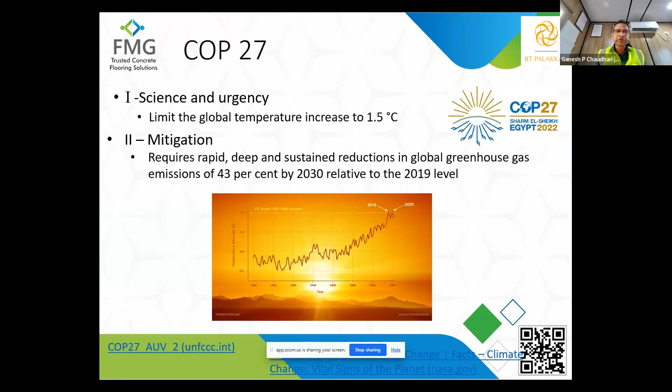My colleague Dr. Sunita Nair, she's a sustainability expert, and we work with her with IIT Madras to do that. So we are a flooring contracting company. This is our target as a humanity, to limit the global temperature increase to 1.5 degrees, and vis-a-vis 2019 we need to reduce 43% by 2030.

A nice saying by Vincent is great things are done by a series of small things brought together. Because my understanding of reducing carbon footprint is also doing small changes in everything we are doing. In terms of our flooring, it is right from concrete to steel to number of man hours, number of machine hours used. This is how we bisect our work.

A law by Müller. I am sure there are a lot of experts here on sustainability, but if we just drive sustainability and it is not having a lifetime performance, then it doesn't make sense. So this should have the impact of all three facets, which is economic impact, of course, because I personally believe if we are developing something, if you are innovating something, if you're not saving the money, then we are not innovating in a scientific way. So economic impact has to be there. Obviously environmental impact, because the topic is sustainability, and also social impact.

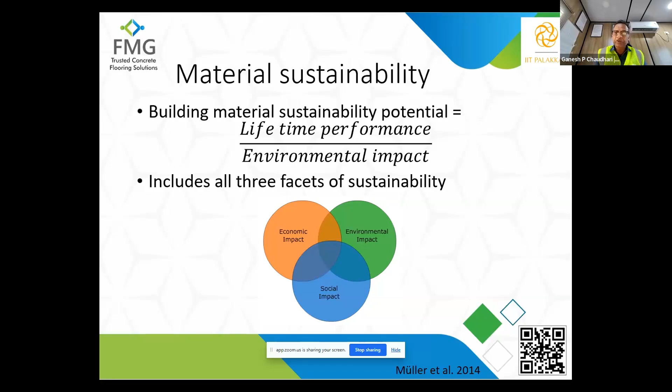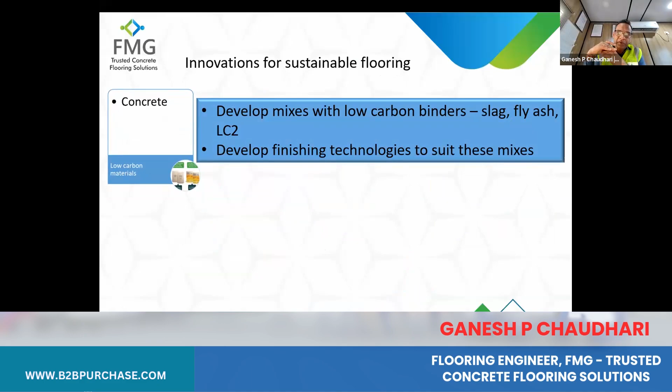On sustainability or on strength, there are a lot of studies of using fly ash or using GGBS for concrete. But when it comes to flooring concrete, the surface area to volume ratio is far different than normal structures, and we need more of a workable concrete, because compare a beam where you are putting concrete with GGBS. After you cast that beam, if you vibrate, your job is done. But in flooring, after you pour, we keep on working for the next 12 hours. So we also have to see the finishing effects of using GGBS or fly ash.

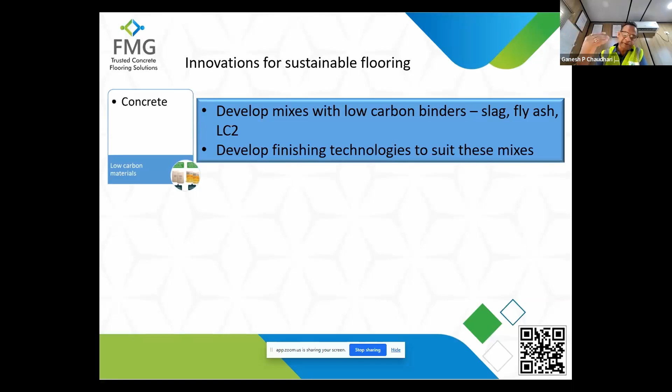Another thing we have developed with IIT Palakkad is, I think all of you must have seen flooring. The flooring is generally cut at 4 meters across India. For white topping, it is cut at 1.5 meters. We are trying to develop a formula or a chemistry with concrete so that we can increase these joint distances. Increasing joint distances is better for maintenance. It is also better for using fewer machines in cutting the concrete. So this is how we are doing it. We are aiming at a 60 to 70% reduction in joints.

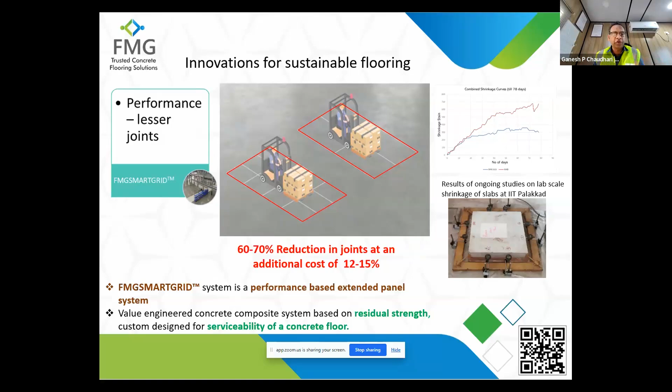We started working on this activity 2 years back. We have got a further grant from the government now to extend the research. I think by end of '26 we will come out with some formula which we can use in any Indian concrete, which will help us to reduce the number of joints in the concrete, whether it is floor or road. This is a bit of what we do with our design.

Particularly, flooring design is controlled in India by some product people or some specialized consultants. In COVID, we developed this software. The use of this software is, it doesn't need any particular code, and it is not tied to any particular product. It is a performance based software based on three codes, which is ACI, our ICI guideline, and TR34, which is the English code, and it is agnostic to fiber type. So we can use any product in designing a sustainable floor. Life cycle analysis: we do cradle to grave analysis for the projects we are into.

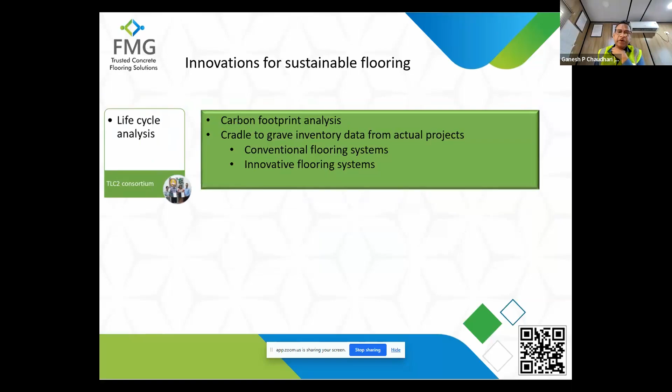This is one case study I want to share. This is a project we are doing in India. This is one pour plan. The people who are aware about flooring will understand this language. So there were two areas in this particular project. One thickness was 250 with 8.75 kg of SFRC, and the other area was 300 thick concrete with 14 kg of rebar reinforcement. We work around with the customer about the application. We work around the use of the floor, and we developed and established the sub base patterns.

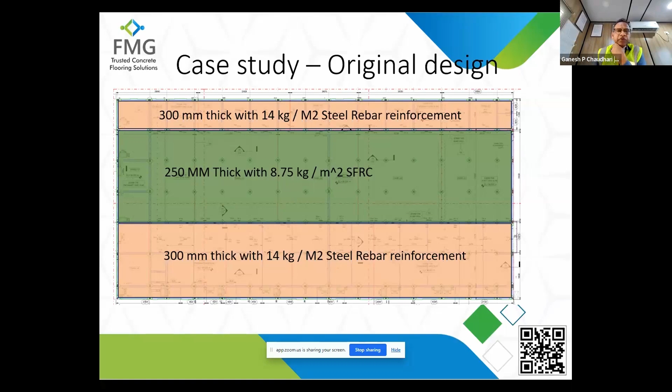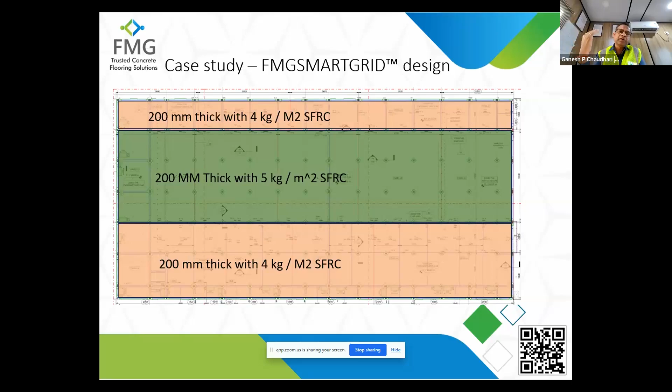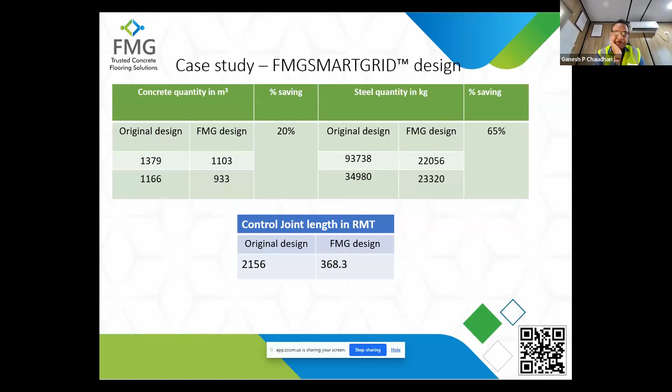So we reduce concrete, thereby reducing cement. We reduce steel, thereby reducing the carbon needed for this. What we got is in concrete quantity we save 20%. In steel quantity we save 65%. In the control joints, 90% of joints we saved. This is the saving in terms of carbon footprint. So we did a calculation with the customer, and the customer could get a 42% carbon footprint saving.

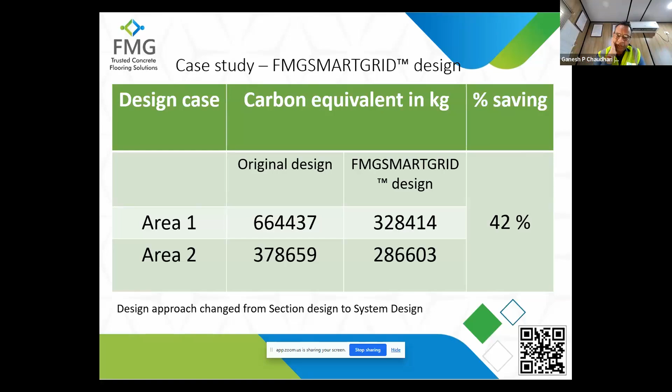From the design, first the project was designed as a section design. So the thickness was designed for flexural strength and steel was designed for cross sectional area. We moved it to system design. So from the elastic approach, we moved the design to the plastic approach. That is the design change we did, and we gave a carbon footprint saving of 42% to the customer.

This is about my case and my presentation. I am not sure whether it was too detailed or too short, but this is what I want to present, Asta.